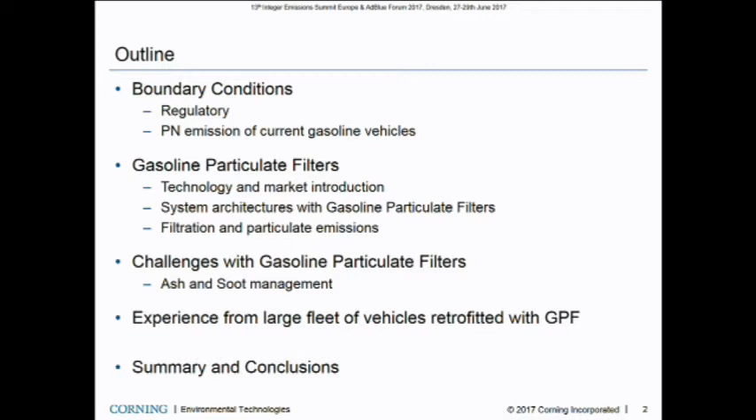So this is on boundary conditions, obviously regulation, and we talked a lot about Europe, so I think we have quite robust regulations for particulates, especially for GDI engines moving forward, starting later this year.

What we've not talked about is China, which is an important market for us. China will introduce also a particulate number limit, actually fuel neutral, so diesel and gasoline, not only GDI, but GDI and MPI. They also plan to introduce RDE regulations.

The current compliance factor that is published is 2.1. The current plan for nationwide China is that the RDE monitoring and the introduction of China 6 will start in 2020, and then by 2023 OEMs have to be RDE compliant.

Besides these timelines, what we do expect, and you will see it later when I show when we expect the introduction, is that several of the eastern provinces or cities, it used to be Beijing, probably also Shanghai and some other cities, will introduce China 6 earlier. They will introduce pieces of China 6B earlier. It's not totally clear which parts they will introduce, but that is actually what is driving GPF introduction in China, as you will see.

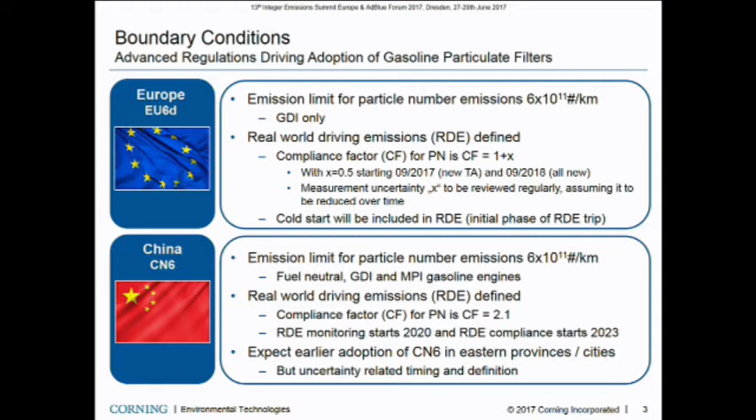So we've seen many of this. This is our version of emission tests that we've done on test vehicles we have in our fleet, with different GDI vehicles, MPI, MPI turbocharged, and turbocharged GDI.

We did testing in Europe. We do use local commercial fuel, so in Europe that's close to Wiesbaden, basically where we get our fuel. We also did some testing in China, in the Shanghai area.

I think the message has already been made clear in all the previous talks. So we do see that, and for us it really is WLTC, not WLTP, we just use a different cycle. We do use RTS as a surrogate, like RDE, as a more stringent drive profile that is easier for us for development purposes.

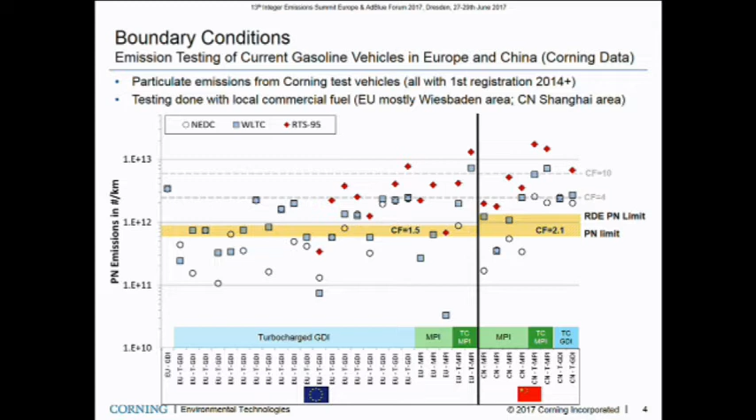We see that I've added the shaded areas for future RDE regulation in the two regions, and there are significant improvements needed from these vehicles, which are all not old vehicles, but current vehicles, so they don't represent Euro 6D vehicles. But there's a significant improvement needed to achieve the required particulate number emissions in the gasoline area.

So what we see and believe is that to meet these future emissions, both are needed. There's a reduction in emissions that come from the combustion, from the engine, needed to manage the filter, but also to get the emissions into a range where the filter can take care of the rest.

And then the second element, obviously, is the introduction of gasoline particulate filters, which we will see pretty much across all applications in Europe. I'm not sure who is familiar with gasoline particulate filters.

So this is a picture of some of our technologies. They basically look exactly like DPFs. If you just look at them, they are actually quite different. But we do use the normal honeycomb ceramic substrates.

They are plugged in a checkerboard pattern where every other channel is plugged on the inlet side, and the other channels are plugged on the outlet side. You might see it here, you might not. Basically, that forces the exhaust gas entering the filter through the open channels. The gas cannot exit on the outlet side, so it is forced to flow through the filter wall, which is porous.

Within the filter wall, filtration takes place, so particles are collected. What's important for those not familiar is that it's not a sieving effect. We actually use filtration based on different mechanisms: Brownian diffusion for very small particles, interception for medium particles, and then, usually negligible, some inertia.

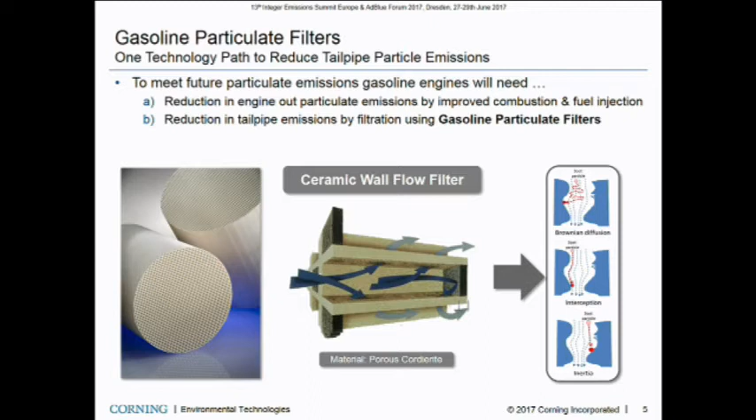So for the introduction, this covers key regions over the years, and we have Europe here, and the green symbols show where we see GPF introduction. For Europe, this will basically start in September this year, so from September onward you'll be able to get vehicles with GPFs installed.

For China, we are separating the eastern provinces and coastal cities from China nationwide, and we expect introductions in the time frame of 2019-2020. So that is reasonably clear.

What's interesting is we've also added India and North America. India has decided to move forward to a Euro 6B type standard with the introduction of Bharat Stage 6, and by 2023 India also plans to introduce RDE. At that time they will have the same particulate number standard as we have in Europe, 6 times 10 to the power of 11.

So there is some likelihood that if India continues on this path, they will actually introduce GPF in India within this time frame as well.

The interesting part is that in North America, the EPA and CARB still maintain a mass-based standard, which will now go to 3 milligrams per mile. We're not sure that GPFs would be needed there, so particulate emissions compared to Europe will be higher in North America.

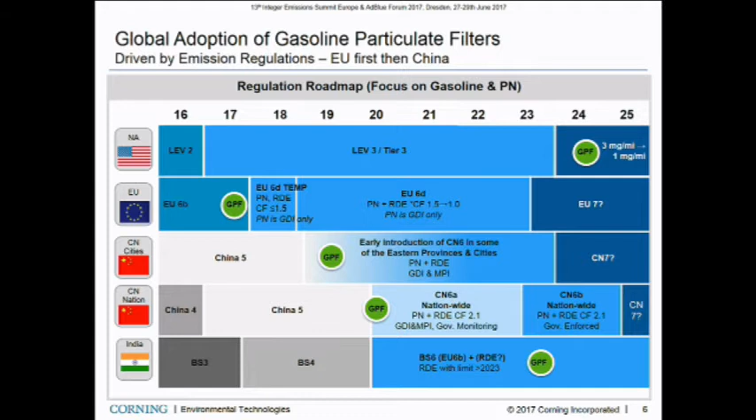On the architecture, James had similar pictures for diesel, and this is what we see in the gasoline world. Before I describe the pictures, this is our pictorial of the architectures: the red is always the three-way catalyst, and the component behind it would be the GPF.

Green I always use for uncoated GPF, orange or yellow for coated GPFs. We also separate between components that are close coupled, so the three-way catalyst is always close coupled to the engine to get the maximum exhaust temperature.

So we do have close coupled installations, and we also have GPFs that are underfloor, just installed below the vehicle body.

What we see is, first of all, the ramp up starting this year, shown in millions of units and cars, and it will increase quite rapidly. Europe should become kind of saturated towards 2018-19, and the additional increase is basically because we start to see volume in China as well. So this is China and Europe, the global GPF ramp up.

What's interesting on the architectures is that about two-thirds of people prefer to go close coupled. The simple reason is that close coupled temperatures are higher, making soot management much easier, which I'll discuss a bit later. The challenge is there's usually no space, which is why some people go underfloor instead.

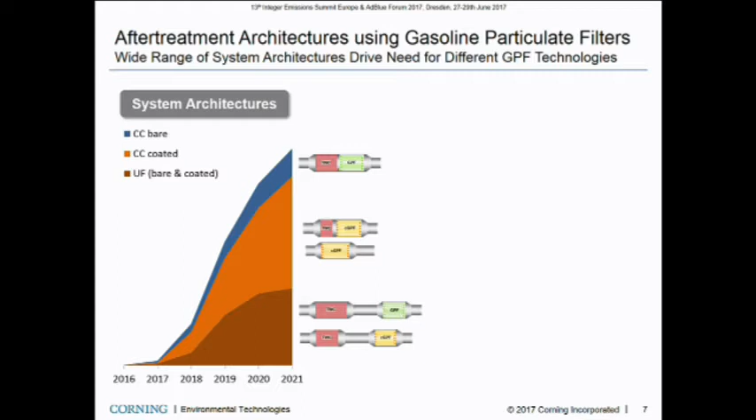Since the requirements for the filters are quite different if you put a catalyst onto a filter, or just use the filter from design, we have to optimize not only for filtration and back pressure, but also for the catalyst coating. If there's no catalyst, we can basically optimize for filtration and pressure drop. So it does require very different filter technologies.

So we've developed two families, all commercialized under our brand name DuraTrap. The first family we call the GC, that's gasoline, that's cordierite. It's in the 200 CPSI, 8 mil web thickness design. It has a medium porosity and is usually used without coating or maybe a light catalyst coating.

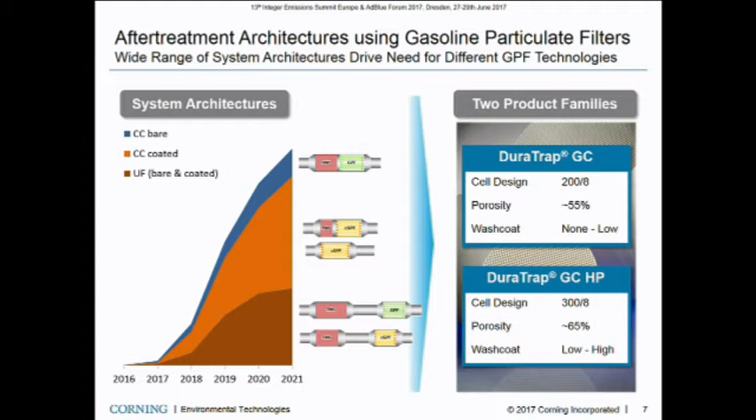The other family we call GCHP, which means high porosity. It has a little bit higher cell density, just to enable better performance of the catalyst that is applied to these. And the porosity is much higher, 65%. For those involved with this design, it's actually quite challenging to get good mechanical strength. The porosity is mostly higher to enable the catalyst coating to be integrated into the filter without having extreme back pressure. So this is basically designed to enable all the currently planned catalyst quantities.

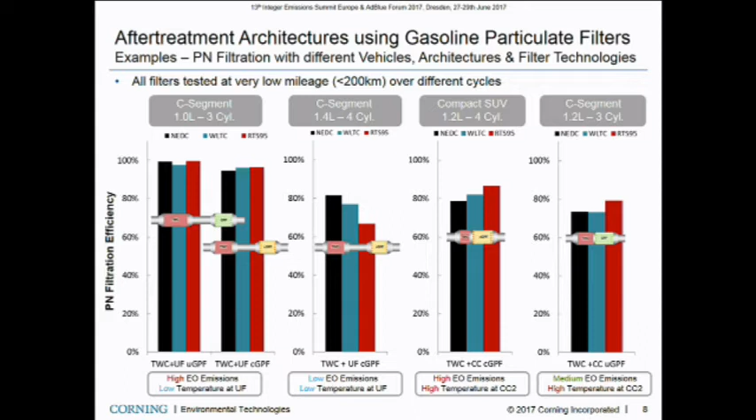This is one example - an underfloor installation where we actually get quite high filtration efficiencies. They're not as high as diesel, but they're close. This is a case where it's an engine that has pretty high raw emissions and very low temperature, so we actually always have some soot, and it is always there. That is boosting filtration efficiency closer to the diesel area. But this is just some examples, and that's what we typically would get. These are all fresh filters, so they don't have high mileage.

Since there is discussion moving forward - today particles are counted starting at 23 nanometers, defined during the PMP work - there's some discussion questioning if that's okay or if we should also include smaller particles, as we might see some, especially on the gasoline side. So we've done some testing, one example from one of our vehicles where we've done normal testing, again NEDC, WLTC.

We've done the normal testing using a CPC with the volatile particle remover, just the normal PMP method. In parallel, we've also done the same test measurement using a DMS 500 - equipment that can also measure particle size, so we can analyze the contribution from smaller particles. In this picture are shown the emissions from the vehicle just as you would buy it, with 3-way catalyst only, no filter. For PN, in blue are the values from the DMS 500 for the accumulation mode - these are the larger particles, and it matches quite nicely with how we currently measure following the regulated procedure. Then green are the particles that are actually smaller - this would be the nucleation mode, so these are really small particles.

And what we see, they basically come additive. It's a log scale, so it's not so easy to say how much it is, so we've added these little pie charts. It's about 25% more particles just by number that you would add. I've seen higher numbers on other vehicles, but this is the case for this vehicle.

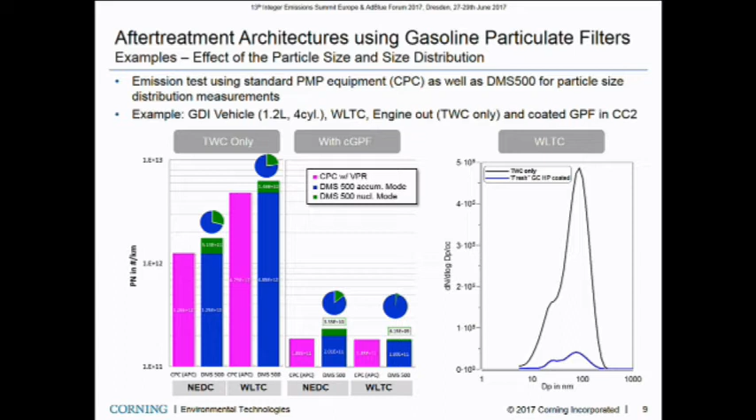This is kind of the same data. This is particle size distribution. This is the size, this would be cumulative number. The black line is just a 3-way catalyst, so this would be this. This is the line with the GPF for the WLTC data. These are like cumulative size distribution over the entire cycle, so it's not at any specific time, but it's cumulative.

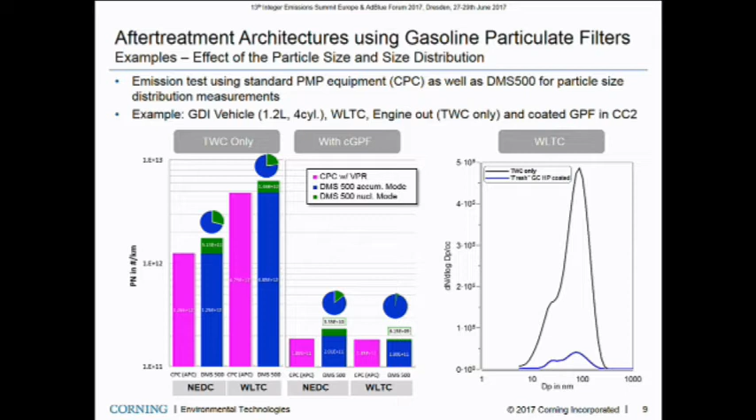We basically see that we also remove basically the filter removes particles over the entire size range, so it's a robust solution. So this was the good thing. This is why we would install a GPF, so it has to remove soot particles or reduce particles to reduce our tailpipe particulate emissions.

And there are challenges with that because the filter removes basically all the particles that are coming. Soot particles are kind of the easy ones because we can regenerate, we can keep burning them from time to time, or in gasoline they probably will burn by themselves from time to time. But the filter also catches ash particles, so these are usually inorganic components that are mostly from lubricant additives, and we don't get rid of them once they are trapped over the life of the filter.

So basically this is just one example. These are 3 test vehicles from our durability programs. This is ash mass in grams versus mileage. So this is up to 200,000, these two are to 100,000. And as you see, as we increase mileage, basically we keep accumulating this ash.

The amount - these are actually, this is like super low oil consumption, this is medium. We've seen more, but basically the quantity is somehow related to the ash content in the oil, to the oil consumption and other factors. But it will happen. So by itself, not a big problem, it's not a huge quantity, and there's actually something that is a nice side effect.

This shows PN filtration efficiency versus this ash mass, so this will be this axis plotted here. And we see these are similar to the values from the previous slide. Even after a very short time with a little bit of ash, we do see the filtration actually improving significantly. That is basically because the ash forms a very fine membrane, it has very small particles, very effective collectors. After some mileage, which means some gram of ash, we get very high filtration efficiency.

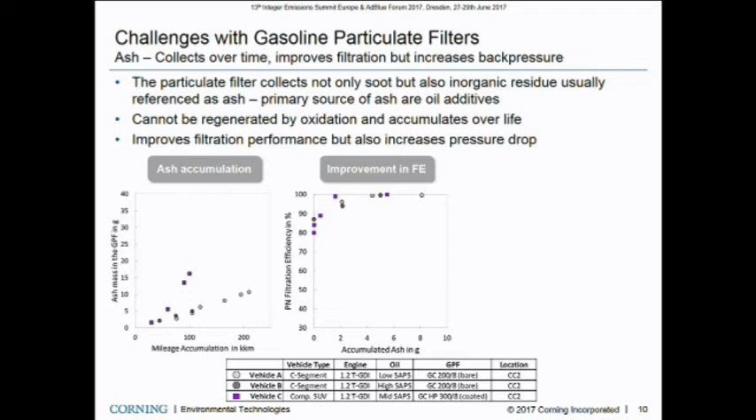It does not come without a price, and basically this shows pressure drop versus, again, the mileage accumulation for these 3 filters. This one doesn't increase too much, although it probably is actually more the scale that doesn't show it, but pressure drop will increase. So we are adding an additional resistance that is something that the vehicle or engine will experience over life, and that is something that has to be considered during the design and also the implementation.

So we have a lot of programs on understanding ash and the effect on the use in application, and it takes a long time to collect data.

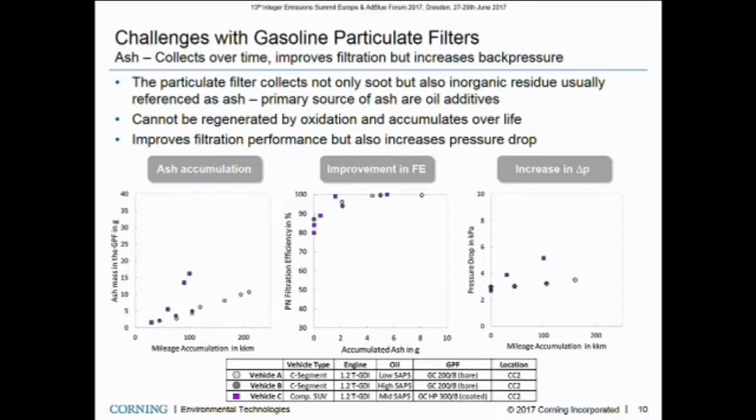The other challenge is soot. So like in diesel, probably half of the effort is actually to manage soot so that you don't destroy the filter. The soot is collected, and if you collect too much, you need to get rid of it, so you have to kind of burn it. I've tried to kind of come up with something that's sort of schematic for gasoline to show there's some applications that are easy, some are more challenging.

If we simplify it, we can break it into two main factors. One is the soot accumulation rate, the amount of soot coming into the filter. It will be high if we have an engine that makes a lot of particulates, so high engine out emissions. That's usually low temperatures, very short trips, frequent start-stops. Low would be low engine out emissions, so clean engines, mild temperatures, long trips.

So this is how much soot we put into the filter, and the y-axis here is the amount of soot that burns passively. Passive means there's no strategy, it just happens as you drive. That is high if we have high exhaust temperatures. This is one reason why you go close coupled, for example, you always have higher temperatures, maybe 100 degrees Celsius higher.

To burn, you need something to oxidize, so that is air. With gasoline, we usually have lambda 1, no oxygen, not air, you need oxygen. You have no oxygen at lambda 1, but there are fuel cuts. This is when you get off the pedal and the vehicle is motoring, pushing fresh air into the exhaust that provides oxygen. So frequent fuel cuts and high temperature favor passive soot oxidation, and the opposite causes challenges.

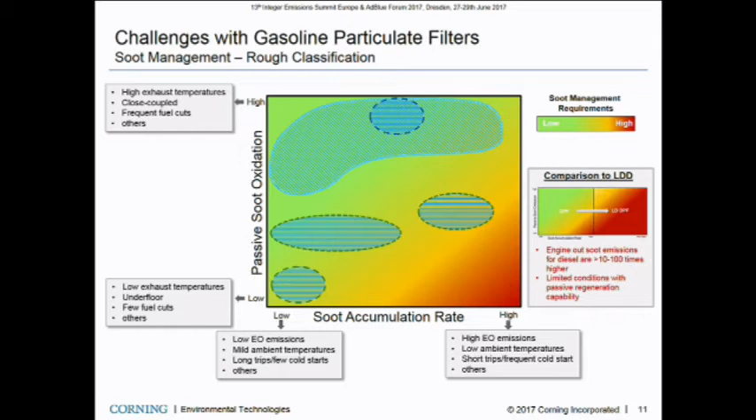I will now show on the next slides a couple of examples from our test vehicles. This is only qualitative, but they're kind of in these areas. This will be the vehicle fleet I show later on. Typically we have operating conditions that are quite favorable, it's company cars. These are three test vehicles I will show some data. We have none that are really super challenging, but nevertheless I think these will serve to show the idea.

So this is now these three vehicles, vehicle A, B, C. What is plotted in all of these is the temperature at the filter, and there's always two lines. These are dedicated test runs that we do. Here the scale always goes to 1,500 kilometers. This is all city driving, so we're talking about days into weeks.

The two lines are the temperature at the filter. This is the maximum temperature observed during one shift. Usually we do one or two shifts depending on how we operate, 8 or 15 hours per day. So this is the maximum temperature we have seen. And then the main objective was: will soot burn passively, or would the application need to do something active?

So these vehicles do not have any active strategy, they just accept whatever happens. Since we've not been very successful in soot loading on a vehicle because the emission rates are quite low, we do something different to study this. We basically soot load ex situ, so we take the filter, put a lot of soot into it, what we think is a very high load. We put it onto the vehicle, and then we monitor the weight of the amount of soot in the filter as we do our test run.

This is shown in this lower diagram. The circles are the soot mass, determined by just weighing the filter. This is 6 grams. Doesn't sound like much, but for soot it's actually quite a bit.

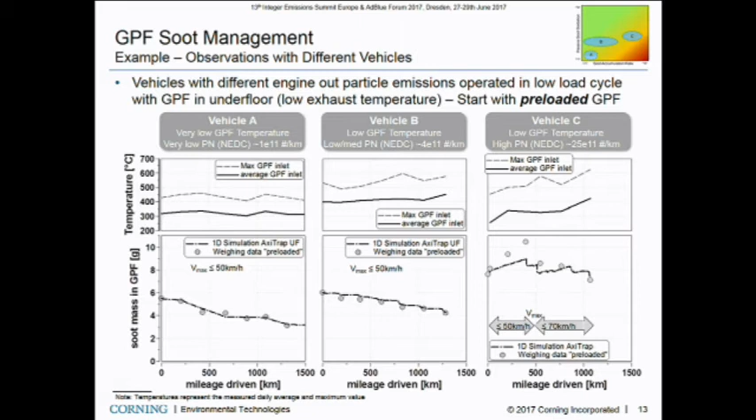So this is another challenge.

Another thing we have to consider is protecting the filter so it's not destroyed, because if we have too much soot, we get a very aggressive soot burning event that can get really hot in the filter. To manage the soot under severe conditions, we usually look at the balance between the heat released during the oxidation of soot — an exothermic reaction — and the heat that can be removed by convection from the exhaust gas.

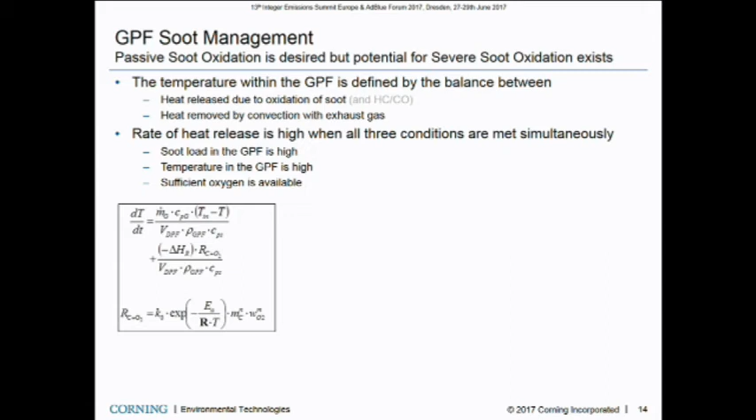The flow rate is just given by however the vehicle is operating, but the rate of oxidation is high when the soot load is high, the temperature is high, and there's enough oxygen. In gasoline at lambda 1, we have high temperature and might have high soot, but no oxygen. But as I said before, during fuel cuts we can actually have everything — if there was high soot load and high temperature before the fuel cut, we get a flush with oxygen. This is what we do for robustness testing.

We do this on an engine bench — it's quite tiny, but basically we preload a filter with soot, heat it at lambda 1 to a target temperature, about 800 degrees, which is quite hot for a close-coupled position. Then we introduce a fuel cut of 60 seconds — quite long, because usually you'd start to change gears or something. As you can see, this is the maximum temperature in the filter, and it actually gets hot.

So this is the maximum temperature. Usually we recommend not going higher than 1100 degrees Celsius. The filter probably can handle a little bit more, but that's a quite good target to shoot for.

This is the soot load in the filter, and the different lines represent data at different initial temperatures. So this would be like underfloor versus close coupled and the condition before. Roughly we see an increase of about 80 Kelvin per gram per liter, roughly linear, and that kind of defines how much soot we can have at maximum in the application. That's an application target that engineers at OEMs have to take care of.

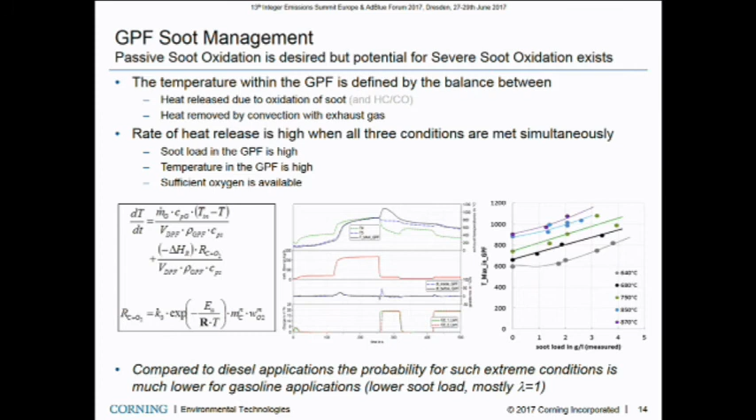From our side, we have to make sure the filter is robust, so we basically do repeated events at maximum temperature, and we do that a couple of times in a row, in this case 10. And we check for filtration efficiency always after that, to confirm the filter doesn't lose efficiency.

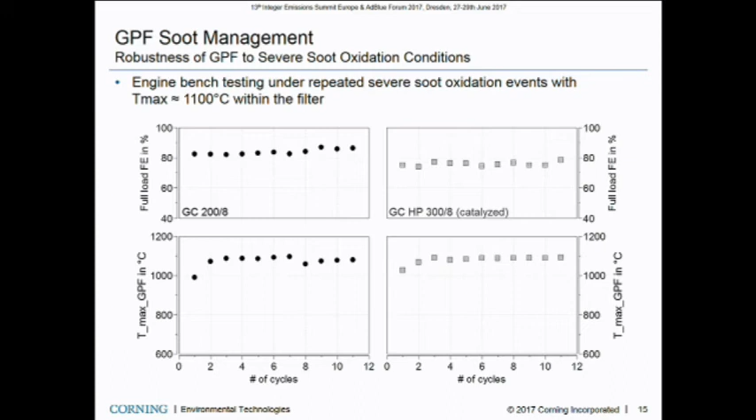So the last part, we've done all that in parallel, and then we have this fleet experiment where we took 12 company cars. We actually told people they had to get a GDI vehicle, which is not common for company cars. They were all first registration 2014 and a little bit later, and we retrofitted them all with GPF.

These are just pictures from them. The cumulative mileage we had when the experiment finished was a little bit more than 650,000 kilometers. For the design, we used a rough ratio of volume to engine displacement of 1:1 - 1 liter engine, 1 liter filter; 2 liter engine, 2 liter filter - as a rough guidance.

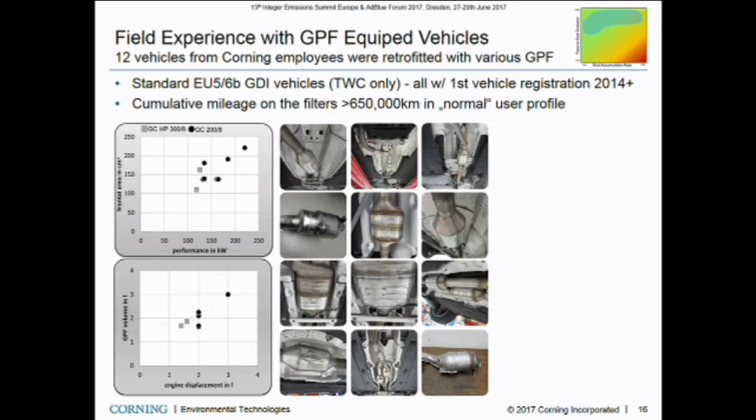We try to have, for higher power cars, larger frontal area, which is good for pressure drop so you don't lose too much power. Then we tested fresh emissions, so the empty symbols are the vehicles as we had them, and the filled symbols are with the GPF, so obviously we see the expected reduction.

These are CO2 emissions measured over the NEDC WLTC cycle before and after the retrofit. We've not seen anything that we can actually measure in our tests.

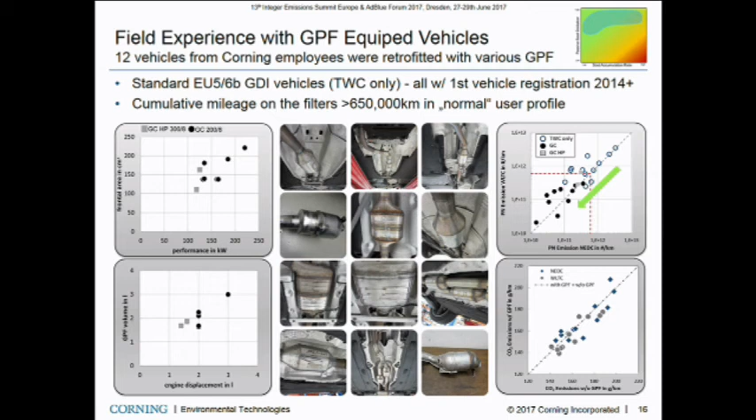And there were no complaints from our drivers or the operators of the vehicles - there was nothing we really had to do. From an operating profile, as mentioned, it's what I had before on the red-green chart. They are all quite easy - they're company cars, so they see fairly high temperatures quite frequently.

So with that, I want to close. To summarize, there are advanced regulations requiring significant reduction of particulate numbers of gasoline cars. Gasoline particulate filters are one technology - I think engine raw emissions still need changes, but GPFs quite robustly reduce particulate emissions.

We've developed different technologies, all based on cordierite ceramic wall flow filters. The design has been optimized for GPF, for gasoline applications, versus DPF. There are different technologies for filters - uncoated, coated. There are challenges that come with the introduction of a new component, and we've tried to do some of our work to help understand some of them and how to address them. They're similar to DPF, but different to DPF, so there are some things we can use from the learnings made on the diesel side - some of them are really, really new.

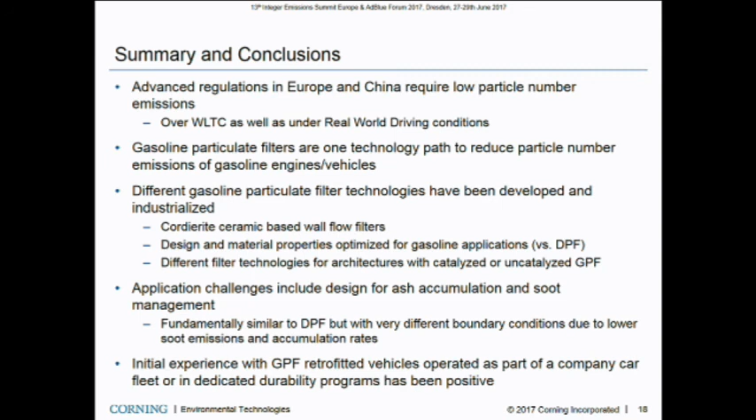Yes. I mean, it's clear you see the emissions drop off after the first kilometers, because a green filter will have different behavior than an aged one. Most of the experiments and results you showed earlier, however, if I understood correctly, were done with green GPFs. Kind of green, so kind of green. We have very few done on zero kilometers.

That's just a practical challenge. Our emission test facility is at some distance from our mechanical shop, but they are almost green - we usually have 100 kilometers on the filter. So that's not sufficient to generate any ash membrane. We've done some on green, but most have a little bit - but you cannot see it on this scale.

Okay, so there is some improvement over the first couple thousand kilometers. Yeah, which is good, but my question had to do with, for instance, when we are going to see these vehicles in in-service conformity testing - they will not be green. They'll be clean, fresh. So we would expect to see even lower values, but similar to the values we've shown. I think our conditioning at 100 kilometers does not make a difference.